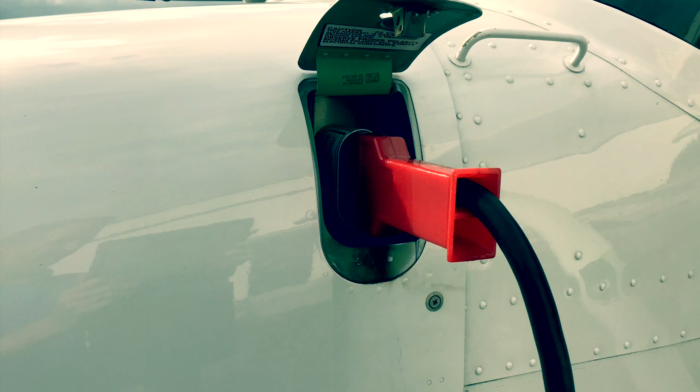All right. So talking about systems tonight. We are going to focus primarily on the concept that you'll have different types of questions covered when it comes to different progress checks, and in association, the end of course progress check will correlate pretty well with the actual check ride.

So you're going to see the same system questions come up, but with deeper and deeper focus when it comes to each individual progress check. So of course we start out kind of basic, then move further in from there. So that's kind of the idea. So obviously systems are really important. The question could be, why are systems important?

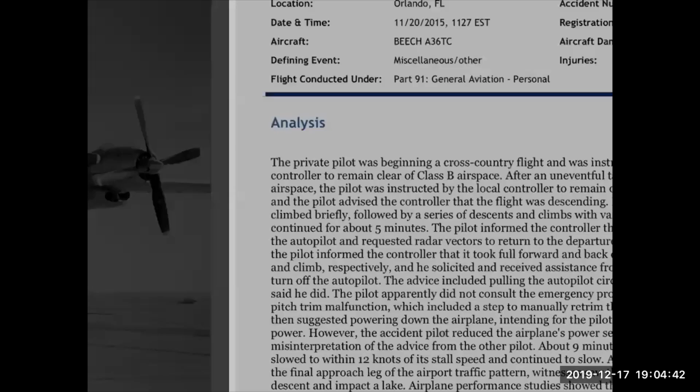So on the opposite of that spectrum, we actually have a situation that occurred close to home a few years ago. This is the basic analysis of an unfortunately fatal accident that occurred literally right in our own backyard in Orlando, Florida. Specifically, this airplane went down in Clear Lake, which is literally on the approach corridor to runway 7. So it had some unfortunate avoidable circumstances that certainly led to the ultimate incident.

In this case, if we read quickly through the analysis, you have a guy departing Orlando Executive Airport. He inadvertently flies into Class B airspace, and then he's instructed by the local controller to exit and then remain outside of Class Bravo. And in so doing, most likely the autopilot was engaged, and the pilot very likely pushed against the autopilot, which was in a commanded climb, to get the airplane to descend.

And that induced a series of runaway trims, or as we call them in this case, pilot-induced runaway trims, because as you push against the flight controls when the autopilot's engaged, the autopilot simply thinks that's some type of force opposing what it's intending to do, so it continues to trim against that. The biggest issue, if we continue to read on, is that for about 5 minutes he struggled with this. Eventually calling on the radio for help, a couple of pilots tried to assist him, told him to pull the breaker. He said he did, and it still didn't disengage.

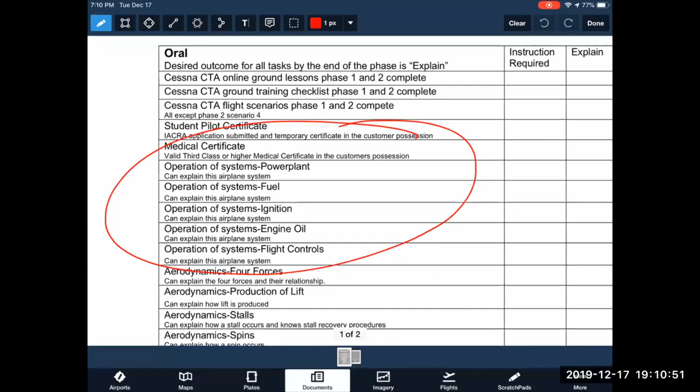So if we think about it, the question is specific. It's not general. So if we're talking about specific knowledge, then we don't necessarily go to the Pilot's Handbook of Aeronautical Knowledge. Maybe that would give us some additional insight, but when we're talking about specifics, that really needs to refer to the Pilot's Operating Handbook or the Information Manual. So we're going to head to the Pilot's Operating Handbook.

The next thing that we could answer is where in this book do we look this information up? You've got the table of contents. If we look at the table of contents and answer the question, generally speaking, what section is this going to be found in? We've got general, limitations, emergency procedures, so on and so forth. Where do we think this is going to be? Well, pretty obviously the best place to get a full systems description on our engine is section 7. So let's head to section 7 here.

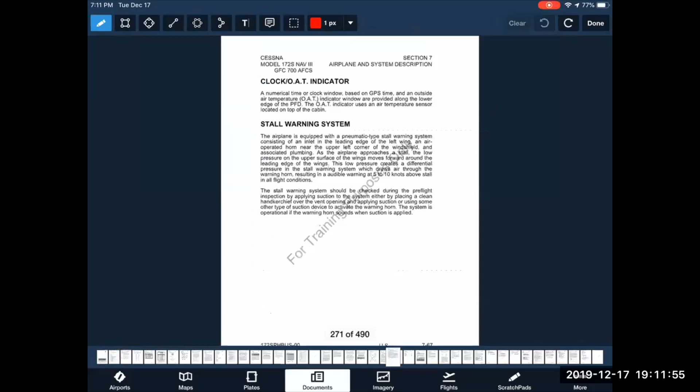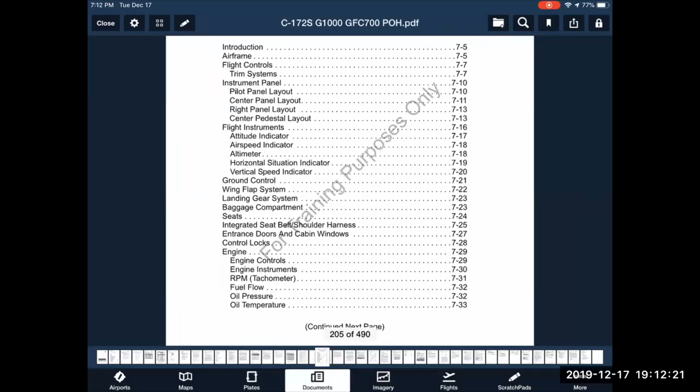And then from there, we're going to find the table of contents at the beginning of the section, and find where the engine information pages would be found. A little bit too far still. So we can see the engine at the bottom of the table of contents starts on 7-29. So let's find 7-29. Let's see if I can hit the jackpot here. Pretty close, so we'll swipe from there.

And so generally the answer we're looking for is pretty much found in this top paragraph. So this engine is ultimately a direct drive engine, which means that there's no gear transmission or gear reduction box. In other words, the engine spins at the same speed the propeller does. There's no speed difference between the two.

Horizontally opposed, that means that the cylinders are situated horizontally opposed from each other or across from each other, unlike a V engine, a V8, or an inline, or a big old radial that you've seen on old aircraft engines. Four cylinders, of course, overhead valve, air-cooled, fuel injected, as opposed to a carbureted engine, with a wet sump oil system. That even kind of goes beyond what we're necessarily looking for as far as the wet sump, but certainly everything up to that point, good information.

It's one thing, of course, to memorize the Lycoming model number so we can spit that out, but what does that really mean to us? That would be, of course, kind of an expected follow-up question. What does it mean if it's a Lycoming IO-360-L2A? So if we break that down, the I means fuel injected. The O means horizontally opposed.

And 360 represents the size of the engine, more or less, more specifically, the displacement. In other words, the volume of air and fuel that is moved. If we were to take a complete stroke of the engine, that would be the volume of air moved for each cycle. And then lastly, the L2A is the accessories package, which they go right into right after this. We'd also benefit to know what kind of horsepower we can produce at maximum performance, and in association, the maximum rated RPM.

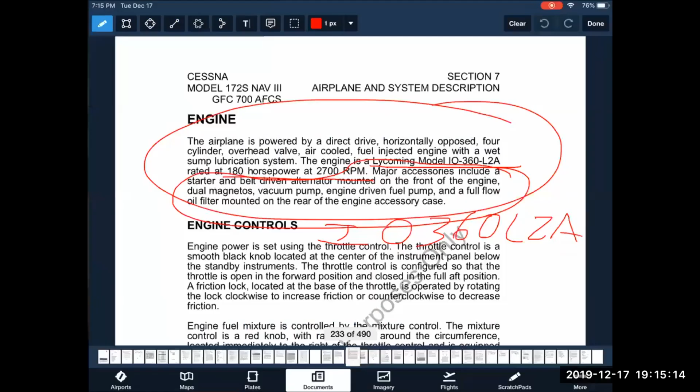Why does the intake valve open and close? What's the purpose of the intake valve, in other words? And secondly, on what stroke does this occur? So once again, let's say I don't know the answer to this question. Where do I find this information? Well, now we're moving outside of specific aircraft knowledge and more to general systems knowledge. So this is most likely to be found in the Pilot's Handbook of Aeronautical Knowledge. Now, if you've read our study guide, you'll know that there are great videos out there, but if we're just talking about reading, the Pilot's Handbook of Aeronautical Knowledge is your best bet.

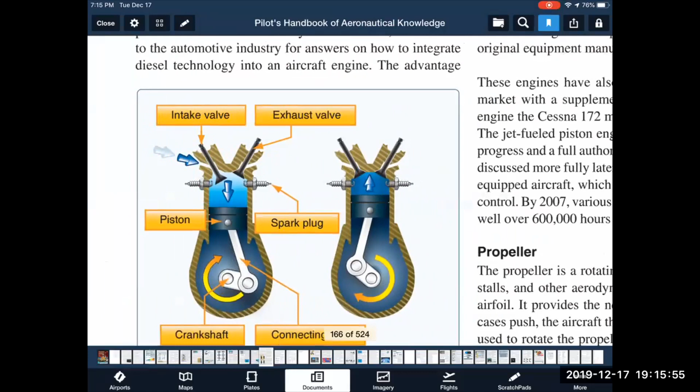Now, I've got a bookmark for this, but the bookmark's not going to be too helpful. That's not what I want to do. So, bookmarked right here, we can answer that question. But more importantly, where is this found? This is found, big surprise, in Chapter 7, Aircraft Systems. And early on in the chapter, they get into the cycling of a reciprocating engine. We can see clearly right here in this step process, as the piston is traveling downward away from the top of the cylinder, that's going to create suction.

You can see the intake valve is located here, which obviously allows our fuel and air mixture to enter the cylinder. And then obviously, if the intake valve doesn't close, then we don't have a contained pressurized system. And without that, you're not going to get good compression, or in other words, you're not going to get very good performance out of the engine. So remember that later, because there's another question that pertains to this. So that's why the intake valve needs to open.

It needs to open so that we bring our fuel-air mixture into the cylinder, and then in association it needs to close so that on the following step, the compression step, we get a closed system, so we get the very effect that we're trying to get. Otherwise, it's not going to be a very good compression, and in association, you're probably not going to have a very good power stroke either.

You know what? I forgot the second question. All right. On what stroke does that occur? I guess we already answered that. So that's obviously going to occur on the intake stroke. It's going to close by the compression stroke. So that's the answer to that question.

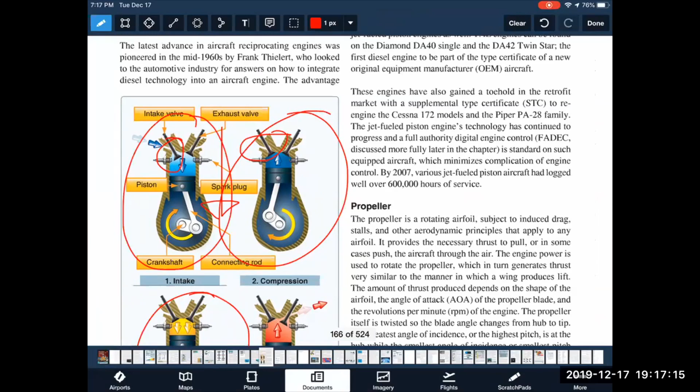All right. So moving along, what are we checking for when we perform a magneto check during the before takeoff checklist? I'm sure everybody's done this so many times that they probably nearly have the before takeoff checklist memorized, but just as a reference, let's open that up. And so we'll find this here under airplane checklist.

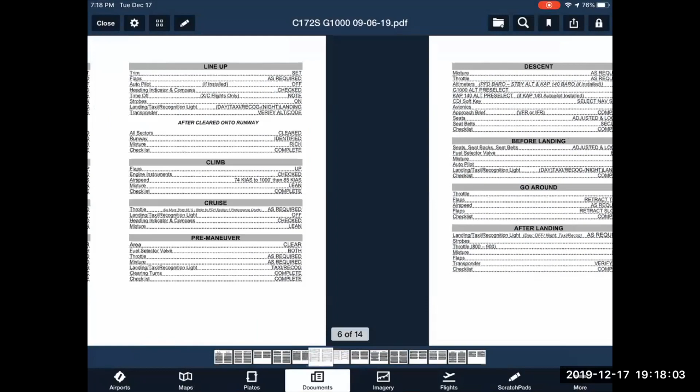Okay, so before takeoff checklist, we obviously know that we perform a run-up, and then of course in association, we're looking for our magneto check to ensure that we have, oops, why did I do that? A tolerance of 175 drop on either individually selected magneto and in association not more than 50 between the two. But why? Why do we care?

Well, obviously, that requires us to understand basic ignition systems. We know that the magnetos ultimately provide the ignition source for our spark plugs to arc properly. So if the plugs are fouled, and if we're not familiar with the phrase fouled, what does that mean? It means that if we looked at a spark plug, we would see basically trash on it, more specifically carbon deposits, because of a myriad of different reasons. Oftentimes, the mixture hasn't been properly leaned, and so we've been running excessively rich, which is obviously why we lean the mixture during ground taxi, to avoid that. But it also could be a problem with the magneto itself.

We can possibly remedy a spark plug that is fouled by increasing the temperature inside the cylinders as they create the power stroke, and in association, those exhaust gas temperatures are going to heat up enough to where they will kind of burn off the carbon if it's not too dirty. If it's too dirty, it's going to have to be mechanically cleaned, and so we will probably not be able to solve that problem on our own. Certainly, if it's a problem with the magneto, there's not anything you can do there except return the airplane and have it inspected by maintenance personnel, and they solve the problem from there.

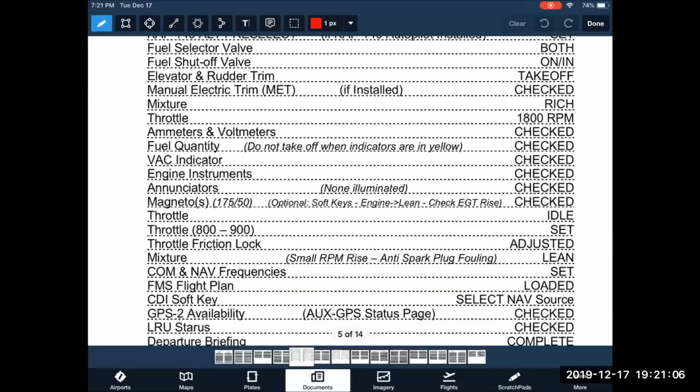Let's take a look at what Cessna's Pilot's Operating Handbook has to say. So we're going to head back to the Pilot's Operating Handbook. We're going to open up to our systems page. Let me clear out my notation there. And we're going to jump ahead to the lubrication system. So what does it say here? Well, in this case, it's not going to get too much into detail about the benefits. It's already going to start talking about specific systems knowledge, but it does say the engine utilizes a full pressure wet sump type lubrication system with aviation grade oil as the lubricant. So that's one of our answers right there.

The oil lubricates the engine because big hunks of metal moving at very high speed, rubbing up against other pieces of metal, is not going to do so well. It's going to get really hot if it's not properly lubricated. So we now know that it would lubricate. It would also help manage the heat of the engine. And it would also help clean the engine, keeping out any kind of components that can dirty up the engine and cause further degradation of the engine.

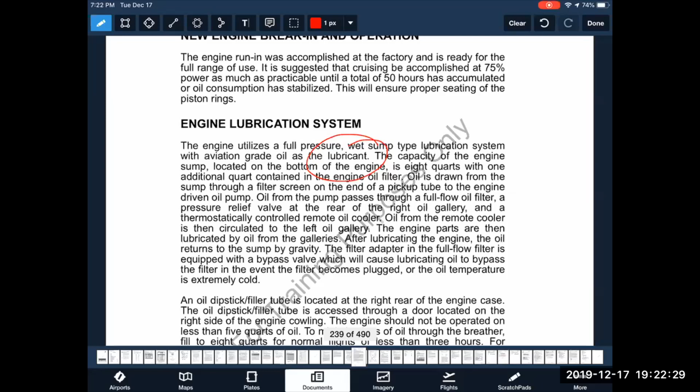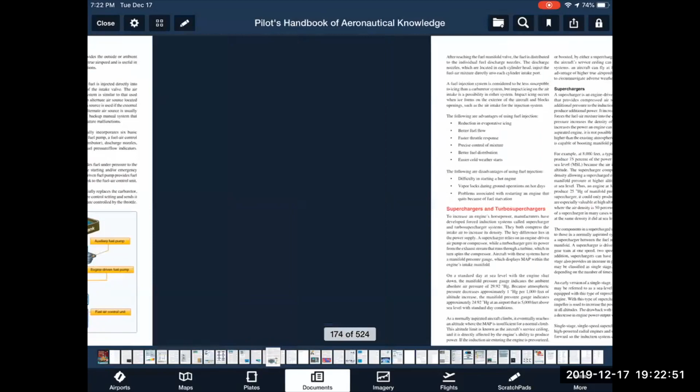Where could we find this information in the Pilot's Handbook of Aeronautical Knowledge? Well, let's take a look. So do we think it's in the systems knowledge chapter? Most likely. So let's see if we can find this together. We can see it's talking about propellers for a little bit, carbureted and fuel injected systems. Then it gets into superchargers.

So, again, all these answers can be found in a myriad of different ways. But if you're just looking at books, not watching the videos that we recommend in the study guide, not going to the online course, the book you're looking at most likely in relation to systems is either the Pilot's Handbook of Aeronautical Knowledge or the Pilot's Operating Handbook for specific systems knowledge.

All right, let's jump into our next question, which is now moving up to Phase 5. So we're going to see the questions move from less of a what type question into more commonly a why, or more specifically a scenario-based question. So we step up not only the systems knowledge, but also the awareness to make a good decision in relation to the particular issue at hand.

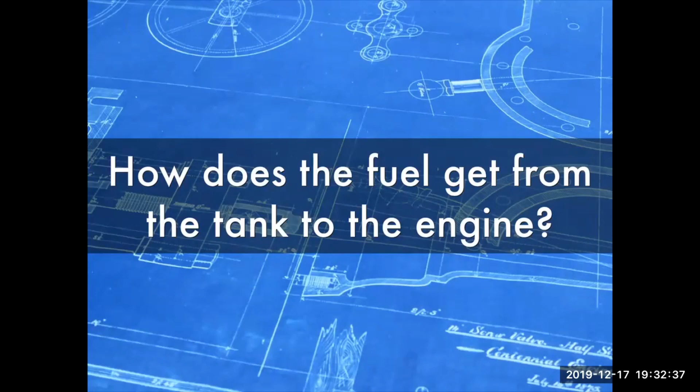All right, how does the fuel get from the tank to the engine? Let's say once again we don't have a clue where to find the answer, but let's think about this. We're getting back into more specific systems knowledge. So once again, the best place to head is the Pilot's Operating Handbook, specifically for our aircraft. So let's head to the POH again.

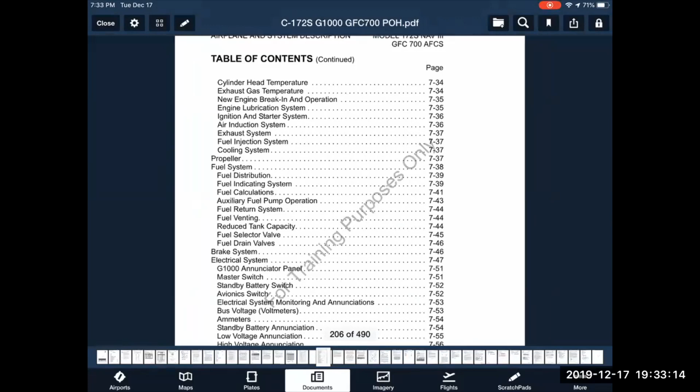And we're looking in this case for the fuel system. We could just slide to it if you know where it is, but if you don't, the best place to head is back to the table of contents, which is exactly what I'm going to do. All right, do we see it on this page? No, we don't. There we are on the second page, on 7-38, we find the fuel system. So let's head to 7-38. A little too far there.

In the actual airplane, there's components we can actually see, and sometimes the fuel lines are going up vertically, also going downward. So this is the best place to start. Then, it's highly recommended to take the cowling off an airplane, head over to maintenance sometime if you're specifically struggling, and view these individual components. But this is ultimately the answer to the question.

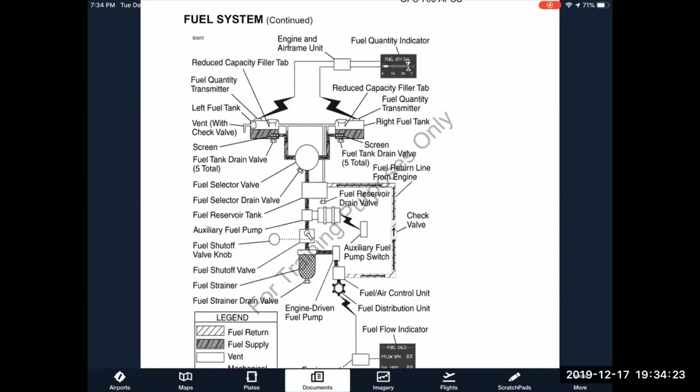Now, are we expecting you on the Phase 5 progress check to draw this out? The answer is no, we definitely don't expect you to draw this out. If you can draw it, that's great, because it assists you in visualizing the flow and certainly helps you recall things instead of having to rote memorize it, which leads to forgetting things. And ultimately what we most importantly want is to make sense of the system.

So if we look here, starting out, let me use my pencil here. We've got some fuel tanks, as indicated there, and obviously we have two wing fuel tanks. There are floats that, via a transducer, give us our fuel quantity indication via our electric connection there.

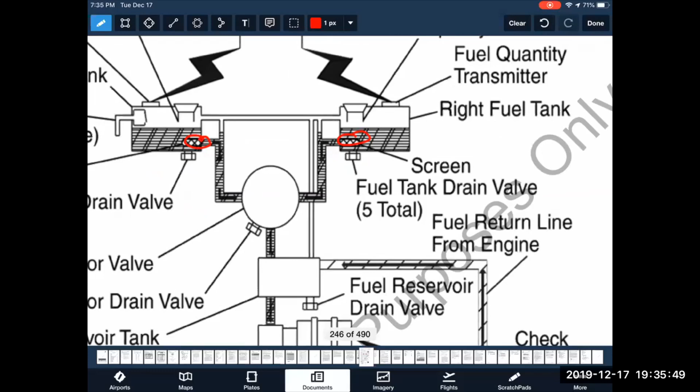We know that, of course, for each individual wing tank, there are 5 drain valves, as we can see indicated here, positioned along each individual wing. Then, once the fuel is introduced to the port or the pickup, there is a screen there that helps ensure that at least large particulate contaminants are contained and are not allowed to be introduced further into the fuel system.

What's the first thing that it goes through? Well, it's our fuel selector. And we know, as part of our pre-flight, that the center drain underneath the belly is drained from the fuel selector because it is a low point in the fuel tank. And therefore, water could accumulate in that location. So thus, the importance of draining the fuel from that position.

Then after the fuel selector, which kind of has an obvious purpose, it allows us obviously to select both tanks or individual tanks. It's then going to flow to a reservoir tank, which is the closest drain to us, I guess, as we approach the belly from the right wing. And so in association, you've got that drain there as well as the drain for the fuel selector. Let me clean this up a little bit.

What's the purpose of the reservoir tank? Well, we can see that there is a return line that reintroduces unused fuel or unselected fuel back to basically a holding position. So that contains the fuel in place to simply then be reintroduced, to then be eventually consumed by the engine. But the point is, of course, that has a low point where water could obviously accumulate. So in association, we drain from there as well.

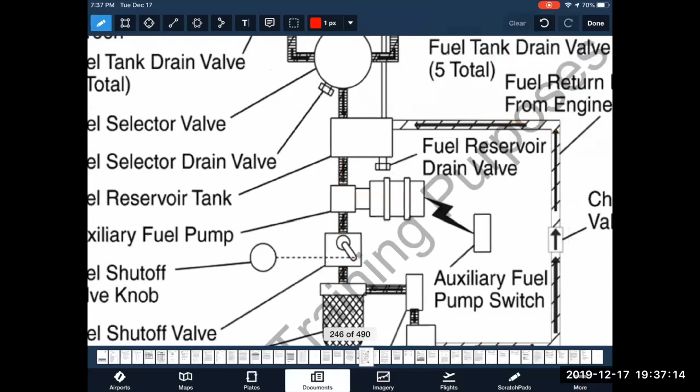Following that, you then have in line the electric or auxiliary fuel pump. From there, we have a mechanical fuel shutoff valve, which of course is the red knob that we can pull out to literally block the fuel from traversing any further into the system, eventually being introduced into the engine.

Then you have a strainer, which is your third belly drain. That, of course, is set up to capture especially fine particulate, fine sediment, for example. And so that's where you certainly likely could pick up any kind of fine sediment if there was any in the system, in addition to, of course, certainly some possibility for water as well. So those are your 3 drains under the belly. That one, the reservoir, and the fuel selector.

From there, we flow to the engine-driven fuel pump. And then our fuel air control unit, which is where we ultimately control how much fuel is distributed into the engine, but also that's, for example, where the pickup box for the air intake that you guys check the air filter, the air is introduced into that control unit.

And then from there, it ultimately goes to the spider, also known as the fuel distribution unit, by way of a fuel flow transducer, which is what gives us our digital indication of our fuel flow. So that way we know how many gallons per hour we're consuming.

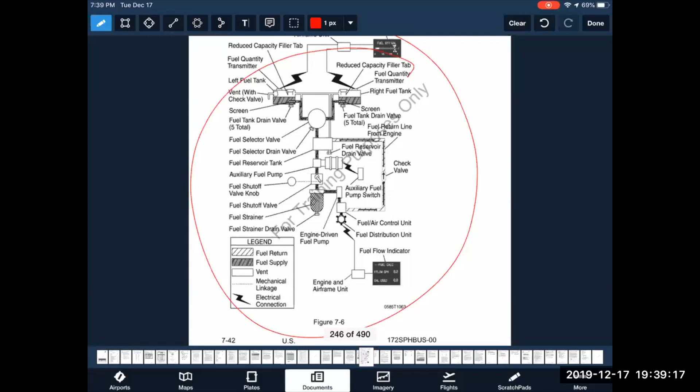Now, how well do you need to explain that at a phase 5 as opposed to drawing it out? Well, the most important thing is to have a good grasp on it. The second most important thing is to remember where to look this information up. If you don't know it by heart, then just as important, probably, especially early on, is the knowledge of where did I find this information before? And that's why we want to do it this way. I don't want to just give you a slide and tell you this is the way it is. You want to learn this for yourself by ultimately knowing where this information comes from.

Yeah, so therefore, if you forgot about this and you're like, I know I'm forgetting something, and you go and you look up the information, you're like, oh yeah, it was the fuel strainer. Then as a check pilot, I'm going to be probably more happy that I know that you know where to look the information up rather than just you memorized it and have no clue otherwise where you could find that information if you ever forgot anything about it.

All right, let's move ahead. So in this question, what would you do if during your pre-flight inspection someone approaches you for small talk?

There's probably a couple of different acceptable answers here. This isn't looking for someone to be cordial. It's probably still best to be cordial. So you could choose to, of course, engage that person in small talk, but what you certainly want to do is save your place in the checklist. At least put your thumb there, if not even maybe mark it in some fashion.

You could also just simply tell the person, you know what, I'm sorry, I don't want to get distracted during my pre-flight. Can I finish this first and then I'll come and talk to you? That's perfectly fine in my opinion as well. Basically what we're looking for here is the understanding that if you get distracted during your pre-flight, it's very possible you're going to forget some things. You're going to skip some things and not realize you didn't do them. So one way or another, make sure that you avoid that possibility, because that absolutely does happen.

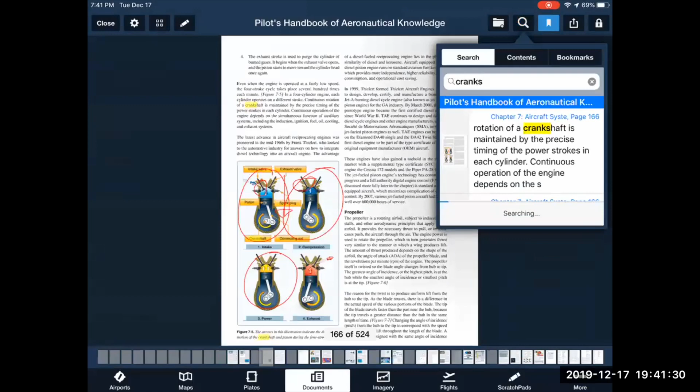And the follow-up, how do you thoroughly inspect the fuel tank venting system? So let's talk about that. As we do our pre-flight walk around, what are we checking for? First of all, we need to know what is venting our fuel tanks. So let's talk about just some general systems knowledge again. We could certainly get into the specifics. Let's say this time I still don't know what I'm looking for, so I'm going to go to fuel vent and see if I get any luck there. I didn't get any luck. Oh, there we go. No, that's not what I'm looking for. I think that's the only one it's going to come up with.

The girls need my help. Oh, okay. Thank you.

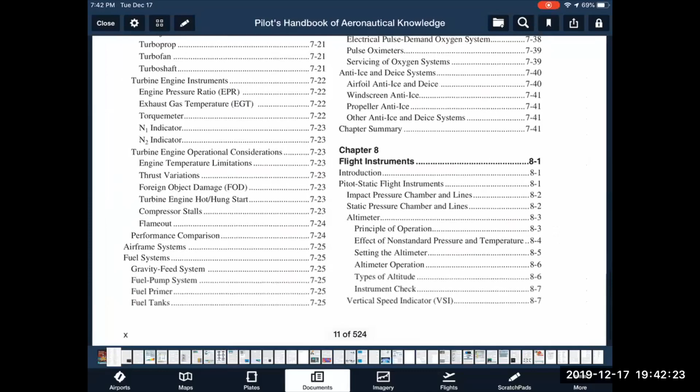Sorry, one second. Okay. So if that doesn't work, then let's try our table of contents and see if we can't find our fuel system. So chapter 7, aircraft systems, we've got power plant. Let's jump ahead and see if we can't find something on basic fuel systems. So there we go. We've got fuel systems on 7-25. So let's jump ahead to that.

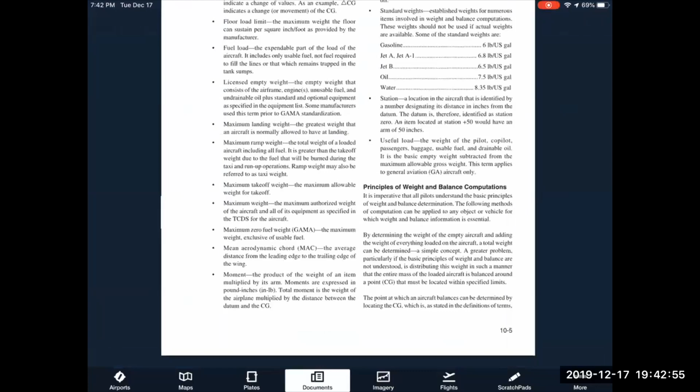But what are we looking for specifically on the fuel caps? First of all, making sure that they secure properly with good O-rings. But we also want to make sure that we don't see anything obstructing the vent opening itself on either side for that matter. And if you're not aware, there's a little orange cap cover that should also be installed to ensure that air is allowed to enter, but nothing else is allowed to enter, or technically escape. So those orange caps should be on the bottoms of our fuel caps as well.

The key is we're checking all of that. So we're not just checking the vent alone. We also need to check the caps for proper security, but also that they are unobstructed in addition. The second part of the question, or I guess I should say the third part: why would an inoperative venting system possibly cause an engine failure?

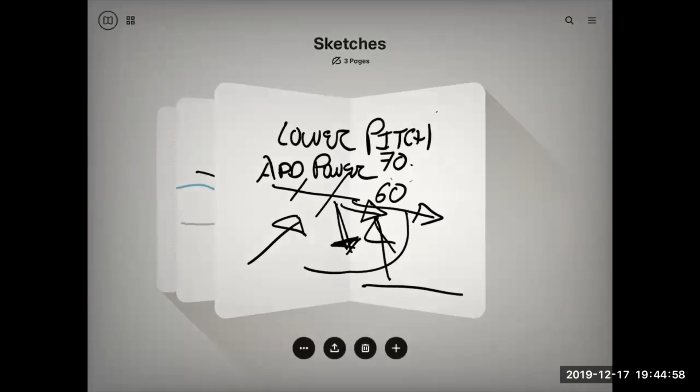Well, let me draw something out for you this time. I know I said I would use references, but this will probably be better to visualize, as admittedly they don't really have the best illustration here. So let's imagine that this is a fuel tank, and we have our pickup port here, and then we have flow in this direction, either due to gravity or suction due to some type of pump. And then we have a fuel amount. Well, if at any point in time our vent were to become clogged up, right?

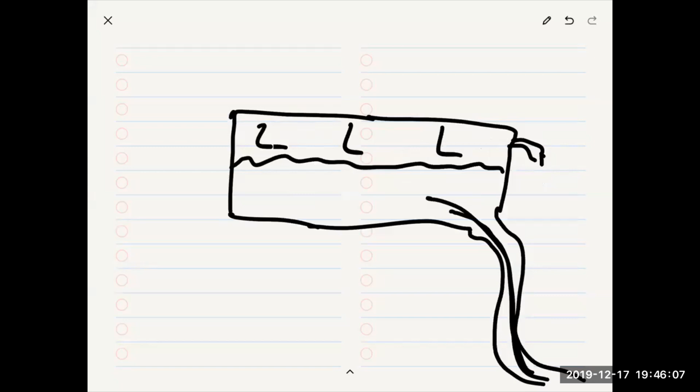So of course air is not able to move into this area and therefore fill this volume. As the fuel is consumed or as it exits via the tank, we have a particular problem, because without air able to replace that area, we create a vacuum. In other words, you create a low pressure area on this section, which means, because of its low pressure, it will create suction and try to pull the fuel in this direction, while obviously the fuel is attempting to go this direction.

So you get the idea. If the vacuum becomes strong enough in that area, it can basically slow, or even worse, fully interrupt our fuel flow to our engine, and therefore suffocate our engine. So it's critical that our vents, or also if we have vented caps, are able to do their job to ensure airflow can get into that area and therefore avoid creating a vacuum. Otherwise, it could possibly cause an engine failure.

All right, next question. While over an open field during ground reference maneuvers, the oil pressure annunciator illuminates. What would you do? So let's stop and think about this situation. We're obviously low altitude doing ground reference maneuvers. We're fortunate enough to be over an open field. The question at hand, though, is what's the significance of an oil pressure annunciator? To answer that, you probably need to know when is the oil pressure annunciator supposed to come on?

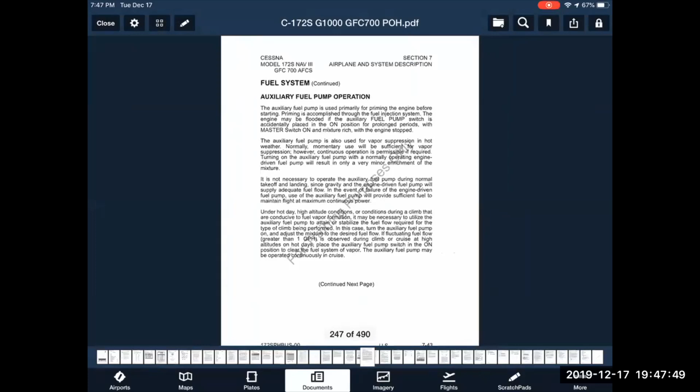Where would we find that information to start? Well, no surprises. It's going to be found in specific systems knowledge. So in this case, it's going to be found in the Pilot's Operating Handbook. All right. So if we're talking about an oil system related question, then obviously we want to head to the engine and oil system. Now, somewhere in here, they're going to discuss instrumentation in relation to oil pressure. And we find it here under engine instruments.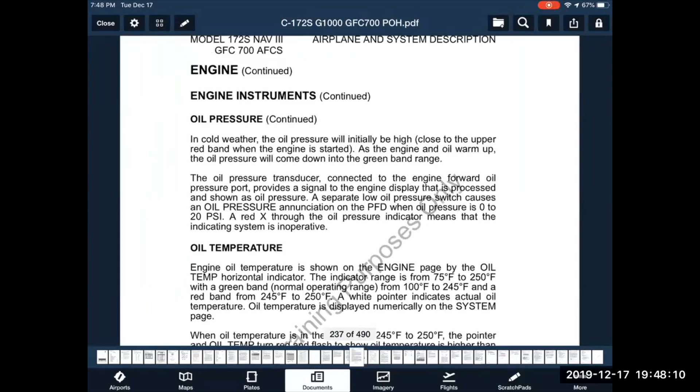And we find that there is information about specifically when that oil pressure annunciator comes on. It says a separate low oil pressure switch causes an oil pressure annunciation on the PFD when the oil pressure is between 0 and 20 psi. Well, that definitely tells us that if that oil pressure switch is on and it's working properly, we probably don't have much of any oil circulating through the engine. Of course, you see this every time you're doing pre-flight when the engine's not running, because the oil PSI at that point is 0, and that's why you see the oil pressure annunciator.

So the question at hand then is are you going to have an engine seizure? There's no guarantee whether the engine will seize up. But if we talk about the likelihood, it's very much likely. So the best decision in this situation is to presume that the engine is going to seize. It's simply a question of how soon it occurs. So do we head to the nearest airport? Well, you're at 1,000 feet. So how close is that airport? And what kind of terrain are you going to have to overfly to get to that airport? It may in fact be the best option to stay exactly where you are.

Well, let's pull our checklist back up. This is kind of a poor example, Emily, because it's not going to be the proper color, so just bear that in mind. It should be not red, but yellow. And it's found on the back side of the abnormal procedures checklist under low voltage annunciator on. Running through the top section, it tells us to turn the alternator side of the master switch off. In other words, we're power cycling the alternator, but before we do that, we're checking the alternator field circuit breaker to make sure it's in.

Now, there's two schools of thought on this. You could push it in immediately. If it opens again, don't push it in again. There's a second school of thought, which is, do I really need what I'm trying to re-engage in this situation? Because the breaker opened for a reason. Either the breaker's faulty, admittedly, or we did have some type of excessive load, and the breaker did what it was supposed to.

So you have to answer the question, do I really need this equipment compared to the circumstances at hand? In other words, weigh the cost-benefit analysis. What's the risk in this situation? Well, it's possible that this could lead to an electrical fire. Unlikely, but fires and airplanes don't mix, so even a low likelihood warrants some consideration. So maybe consider before you even push the breaker back in, how desperately do I need this capability?

And then, let's say that it's already in, or you've chosen to push the circuit breaker back in. Then you would turn the alternator side of the master switch back on. And then if things are hunky-dory, in other words, you've re-energized the alternator, we should see the low voltage annunciator extinguish. We should see the main bus volts a minimum of 27.5, and the amps on the battery should also show a charge as well.

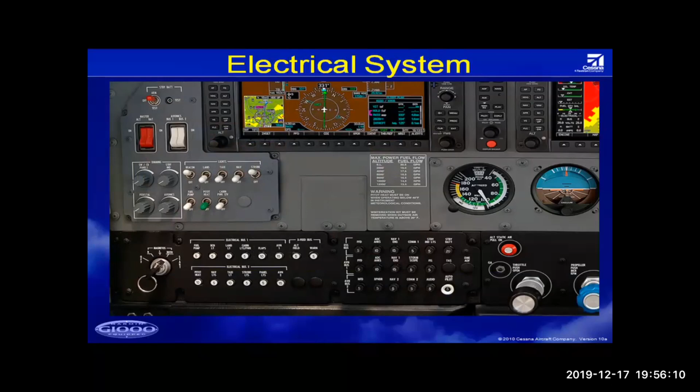So where is our electrical system? Really what you can do is visualize different components in different sections of what we're looking at on the screen here. Bear in mind that this is a 182, so you'll see that there's a small set of differences, but for the most part, pretty much the same stuff. So when we talk about the electrical system, we have the switches in the top left-hand corner. Then we have the circuit breakers down below, which are organized in buses.

So if you've ever wondered what power strip, if you will, or what bus a component is on, all you have to do is look down there at the circuit breakers, and they are organized in conjunction with the buses that they're on. Then we have our alerts and annunciators, and we have our voltmeters and ammeters.

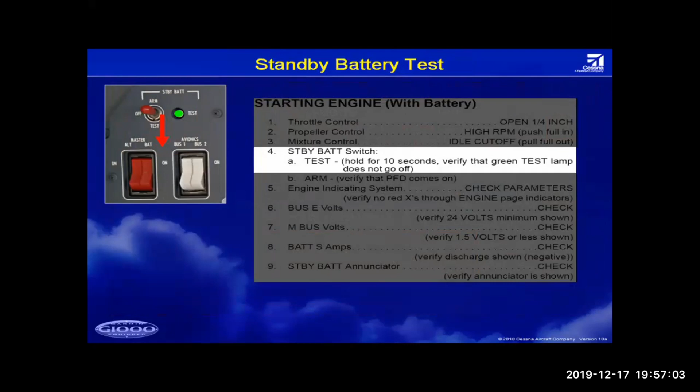All right, so everybody should be familiar with this, of course. We push the standby battery switch into the test position for 10 seconds, verify that the green test lamp doesn't extinguish. Then we arm the standby battery. And then at that point, what is happening? The primary flight display illuminates because the essential bus is powered.

So if you want to know what the essential bus comprises of, we've got a breaker for our primary flight display. We have a breaker for the air data computer, which gives us all of our airspeed, altitude, vertical speed information, as well as the attitude and heading reference system, or AHRS for short, which gives us our pitch and roll and heading information. We've got a circuit breaker for navigation radio number 1, as well as the engine airframe unit, which is our EIS as well.

We've got a circuit breaker for communications radio number 1, and a circuit breaker for our standby instruments. Their indicators have backlighting, so there's a breaker for that. And then lastly, there's a breaker for the standby battery. That's what's being powered right now, as indicated by the yellow. The yellow means that we're discharging from the standby battery. We're drawing from it, so this wouldn't last forever, thus the yellow color coding associating a draw from the battery.

All right. So this is what we get when we check the electrical bus volts as well as amps. We get a draw on the standby battery. The first thing we check in the checklist is to make sure that the essential bus is at 24 minimum. That tells you that the standby battery is in good health. It's where it should be. But this is checking to make sure the standby battery is not powering anything else.

If we look at the diagram, there are check valves known as diodes that disallow flow from the essential bus to any other electrical components. So you're checking that very aspect. Every single time you've done this pre-flight, this is the very thing you're checking for. You're making sure that the standby battery can't power anything else except for the essential bus. In other words, if you saw that the M-bus volts was above 1.5, then it's possible that the standby battery might be powering some components on the M-bus.

And if this situation occurred in flight where the standby battery was running the essential bus, it would drain faster, or possibly be unpredictable in how long you can expect it to last. So we're checking to make sure that the essential bus is contained by that check. We're also making sure that the draw is indicated on the standby battery. We can see that there's negative amperage or draw from the standby battery, and the standby battery annunciator is illuminated.

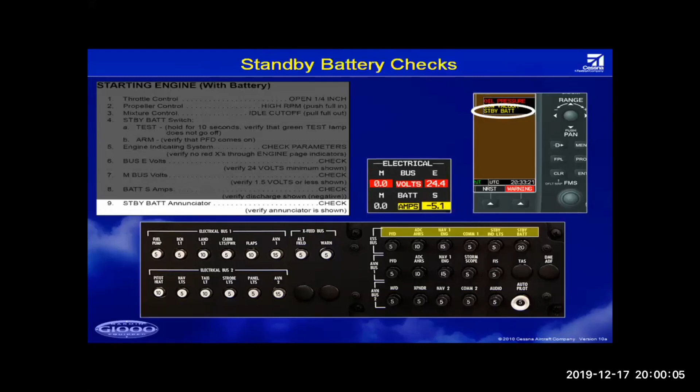All right. So far, so good. So then we turn on the master switch. When we do that, we can see that the M bus, now comprised of electrical bus 1 and bus 2, that also feed a cross-feed bus, is also being powered in addition to the essential bus. That means that the master battery, or the main battery, now powers electrical bus 1 and 2, as well as the essential bus. And you can see that there's no longer a draw on the standby. There's a draw on the master battery, and there is no standby battery annunciator.

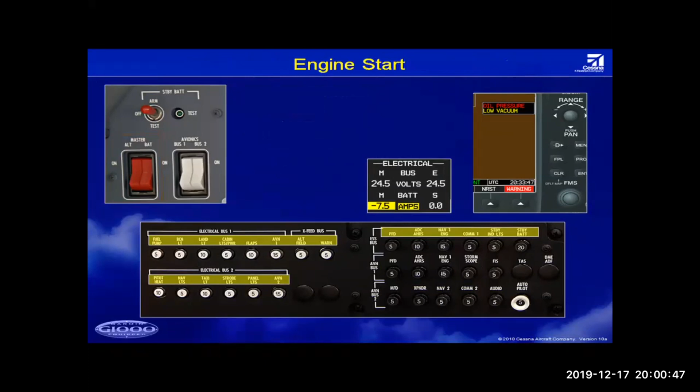All right, we start the engine up. What happens? Well, obviously our belt-driven alternator that is accessorized to the engine crank will then in turn, of course, begin to rotate. And as long as it's operating properly, we now jump from, notice the bus voltage before, 24.5, to now the alternator running the system at its capability at 28. So the buses now run at 28.

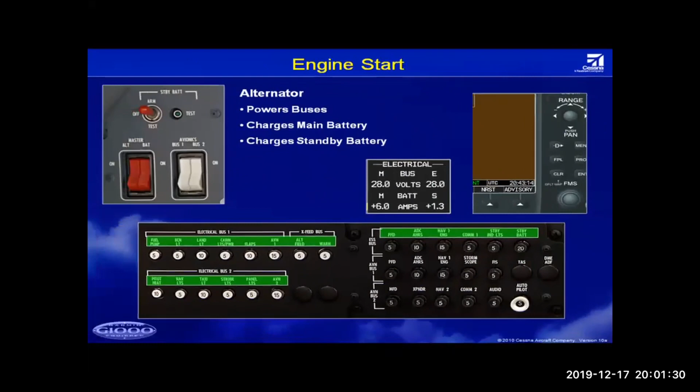So when we turn on the avionics switch, of course, bus 1 and 2 are then powered. And this is your normal operation. There should be no annunciations, right? No alerts. We should see 28 volts. And of course, once the batteries are fully charged, you should see 0 amps because there's no flow in either direction. Everything is fat and happy. It's sustainable. We can continue on like this basically for as long as we can keep the alternator operating.

So what happens then in an alternator failure situation? What is our first indication? This is a very likely possible question, for example. Your first indication is not audible, not visually depicted in the CAS window as it's known, or the annunciator window. It's the yellow associated draw from the master battery. That's the first indication. So you are powering, once again, everything via the master battery. And thus, that's why you have a large amperage, which obviously means we're depleting the master battery quickly.

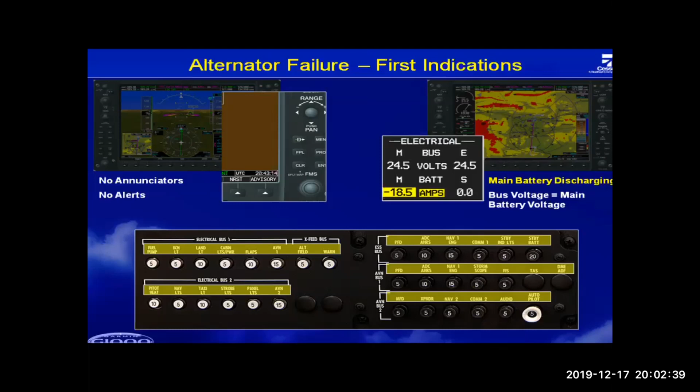So that's your first indication. There's not going to be any aural association again. There's not going to be a bunch of flash. It's just a yellow coating down the bottom left-hand corner of the multifunction display. Then, once you drop below 24.5, that's where the bus volts will begin to flash at you. Again, no annunciators, no aural alerts, just a flash.

Now, it does flash back and forth. I wasn't able to do the red and white flash, but those bus meters will ultimately flash back and forth. And that's more likely to catch your attention, even if you're not really looking in that specific area, because it simulates motion and is more likely to grasp your attention. But once again, not audibly yet. Not until we drop below 24 do we then get the low volts annunciation.

You also get the flashing warning down in the alert soft key, which will not stop flashing, nor will the aural alert that chimes every 2 seconds until you acknowledge by pressing that alert soft key. Again, the alert soft key there underneath the warning light will stop the aural alert and also the flash at you. That acknowledges that the system has gotten your attention and therefore it will stop bugging you. But until it thinks it has your attention, it's going to keep bugging you.

So this is what you would see. You've got bus volts below 24. You've got a draw on the master battery. You've got the low volts annunciator. And, of course, the warning alert soft key down in the bottom right-hand corner.

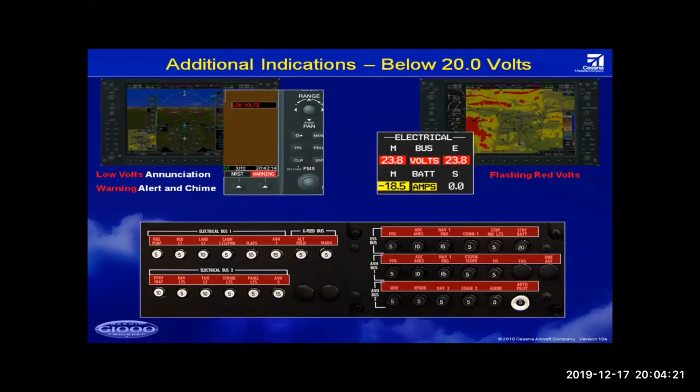Then once you drop below 20 volts, that's when the standby battery will begin to power. Now, you may think it's going to power everything, but once again, as we just discussed, it's not. It's only going to power the essential bus. The master battery actually continues to power everything else. But at this point, the standby battery kicks on, and that's when you know, based off the manufacturer, you have approximately, for a healthy standby battery, at least 30 minutes, where the main battery at this point is going to begin to rapidly deteriorate.

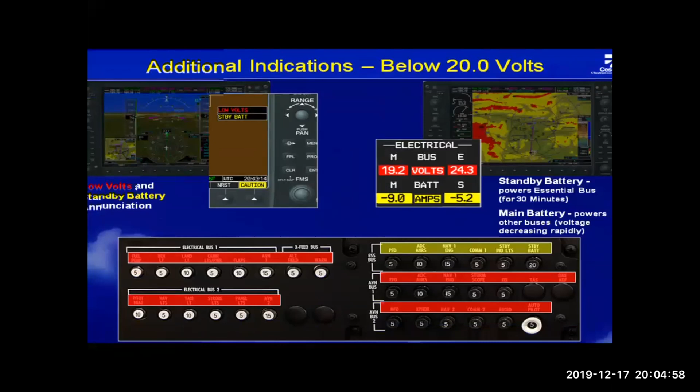And in association, by the way, I forgot to mention, you'll get the standby battery annunciator and a caution alert, just a single audible chime. As the main battery begins to decrease, you can expect the MFD to basically dim down, the audio panel disappear. Basically, everything that we see in the avionics buses will be unavailable unless there's a redundant source of power.

So at this point, standby battery is powering the essential bus. And at that moment, like I said, even before the master were to fail, that's when your tick starts down for a 30-minute time frame. Is this enough to get on the ground? Absolutely. Again, we even talked about a full electrical failure would still be manageable in lots of different circumstances.

So what do you get on the essential bus one more time? We get a primary flight display, the air data computer, the attitude and heading reference system, navigation radio 1, engine airframe unit, communication radio 1, and power for the standby lights.

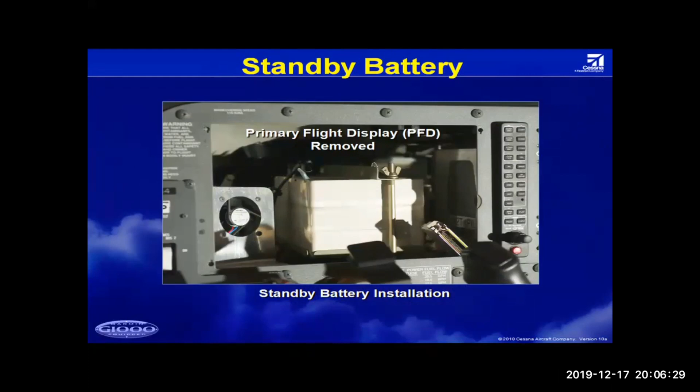If you want to look at this again, you can take a picture of it now, take notes, whatever have you. But remember, next time you're doing your pre-flight, all you have to do is look down, look at the circuit breaker panel, and you will see that very picture there showing you what's on the essential bus, for that matter, any other bus as well. And then lastly, we just got a quick picture to show you where the standby battery is. There you can see it's actually located behind the PFD in that case.

All right, so now that we have some systems knowledge, of course, we can really figure out what we're going to do. So we would go through our checklist after we verify we were in control of the airplane. If we were unable to remedy the situation, the best solution, obviously, is to just head back to the airport. There's really no need to declare an emergency unless you absolutely feel necessary, because you're going to have plenty of electrical power to get back to your destination.

Now, better decision-making on top of this is the consideration to run down the standby battery and then save the master battery for your destination. Why? Well, what did we not see, of course, that was on the essential bus that we would probably want for landing? And we saw that, of course, flaps was not on there. So if you would like to land with flaps, you may consider using your standby battery to traverse your cruise flight, and then, of course, use your master when you get there.

To be perfectly honest, if you catch this early on and you haven't just completely ignored the situation, even if you didn't do that, the master battery is going to last certainly long enough to get you back here without really any type of hiccups.

All right, phase 10. So things jump up a little bit. We have increased systems knowledge, increased complexity, and perhaps more pressing circumstances. So in this case, while en route, the oil pressure annunciator illuminates, but upon investigating the current oil pressure, you find it reads normal parameters. The oil temperature also reads within normal parameters, and it's not rising. So how is this possible? And what would you do?

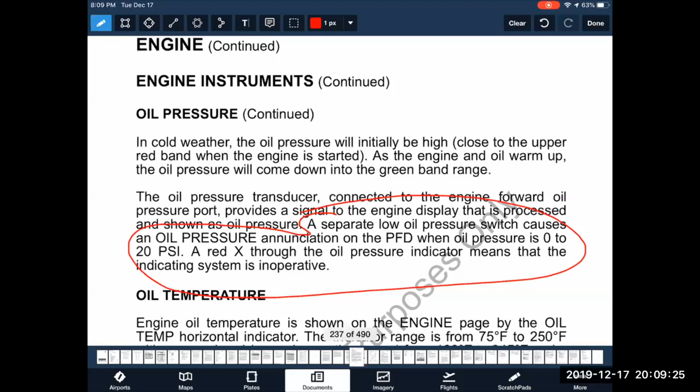So let's do some deductive reasoning in this situation. We have an oil pressure annunciation, but the current oil pressure and the temperature show normal parameters. They're not showing any signs of any issues. So if we deduce the situation, it's likely that we have a faulty pressure switch.

And therefore, probably the oil pressure is okay. In fact, it's very likely it is. And most likely, therefore, will not cause any issues. But remember, there's the second question. What would you do? Your best course of action still is to make a precautionary landing.

However, instead of necessarily waiting for your engine to fail, circling over a field like we talked about in the previous situation where all indications are showing an impending issue with the oil, in this circumstance, make a precautionary landing at your nearest suitable airport. You don't need to make an off-field landing unless obviously the other indications begin to indicate some problems. But you should still make a precautionary landing.

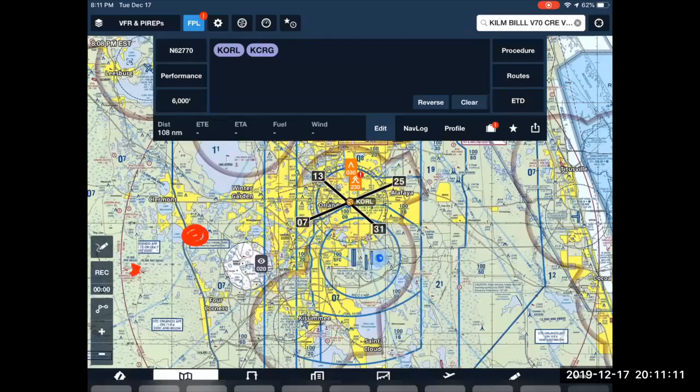You would not continue on your way to your destination even if that destination was, say, 30 or 50 miles away, when there's obviously a more suitable practical field that's closer to you. On top of that, even better decision making would, of course, be avoiding populated areas once again. So let's say, for example, let's just create a quick flight plan here. So our destination is Craig Field up in Jacksonville. And this circumstance occurred maybe in this area, let's say right here.

I could choose to divert to Daytona Beach or Ormond Beach, but I am going to have to fly over fairly populated areas to get there, even if it's not the yellow light illumination that we see on the chart. It may, in fact, be better to divert to an airport where I know I'm still over relatively unpopulated areas, and therefore more likely have more forced landing options along the way. That would kind of be your best decision making going forward.

But the main thing we're really looking for in this situation is ultimately that you would make a precautionary landing, and basically as soon as practical. Just because even though we're pretty confident of what likely the situation is, there's no reason to be hanging out in that airplane in case it's not the case.

All right, our next one. While on a cross-country flight, the alternator fails. You have attempted to rectify the issue to no avail. So now discuss for us how you would load shed considering the nearest practical airport is 45 minutes away. In other words, you've got to elongate the life of the battery. What can you do to elongate the life of the battery?

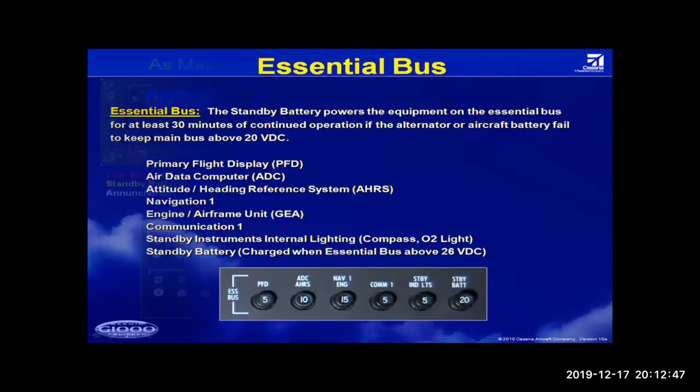Well, that requires systems knowledge, and it also requires systems knowledge to a point where you understand what's drawing heavily on the battery. So let's go ahead and do this. We'll go back and we'll look at some of the components here, and then we'll also look at them separately in a separate circuit breaker diagram. Here's your first answer. The first thing you want to drop is the battery basically providing electrical power to a failed alternator.

So this isn't something I'm going to get too heavily into just to save time, but if you didn't already know this, an alternator doesn't work exactly like a magneto. A magneto uses a permanent magnet. An alternator uses an electromagnet system, which means that you need to have electrical current to basically turn what's commonly known as the iron core or the rotor in an alternator into an electromagnet. Without it, you won't produce electrical current.

So the point is, that alternator's not working. Where do we get power to electrify the alternator? And the answer is the battery. If you want to test this, the next time you go out to the pre-flight, turn on the master switch with both switches on and look at the draw on the master battery. And then turn the alternator side of the master switch off and see how the amperage draw drops.

So if we're talking about load shedding, obviously the two things we need to consider is, do we really need this stuff? If we don't need it, then there's no reason to have it on drawing away from the battery. So it's a no-brainer to turn off the alternator side of the master switch because it's not giving you anything. Lights are also a good thing to turn off, but at least they technically give you something by making you more visible to other aircraft.

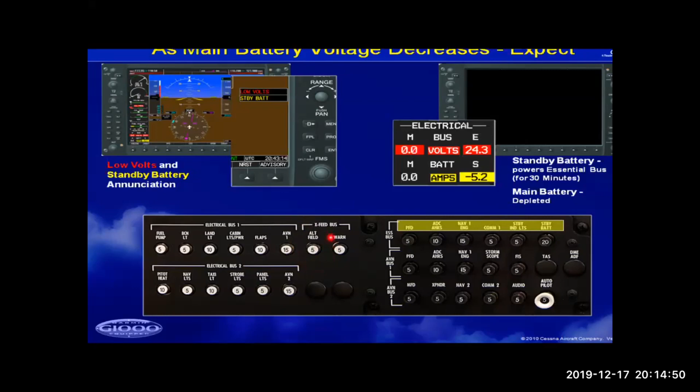If you're powering the alternator side of the master switch, I should say just powering the alternator, you're literally wasting electrical power with absolutely no benefit whatsoever. So that's a no-brainer. That should be the first thing to be turned off in this situation.

If it's a day flight, you probably can get away, obviously, with turning off pretty much everything here. We shouldn't be using the flaps, obviously, while we're in cruise. We don't need our landing light or beacon. We certainly don't need the fuel pump, the pitot heat. All of those rocker switches, in other words, should certainly be off to elongate the life of the battery.

So what it really comes down to is perhaps what you should do in this situation. And this is where we can get some more help, obviously, by referring to the pilot's operating handbook, looking at some checklists in association. So let's jump to that. Take a look at what guidance we have there. So we'll start with the checklist that we have, of course, and then we'll also take a look at what the POH specifically talks about.

So same checklist we were looking at before. What guidance do we get in this checklist? Well, we can see it, in fact, already tells you to do the thing that we just talked about. It will tell you to turn off the alternator side, but now you know why. You're doing it because it's drawing away from the battery.

Then it says non-essential electrical off, avionics bus 1 switch off, COM 1 and NAV 1 tuned to the active frequencies and select, and then avionics switches bus 2 leave on if you're in IMC, but we're not in this situation, so we'll turn off. And then obviously we're trying to get to that destination airport. So we've literally turned pretty much everything off except for the essential bus. And therefore, by doing so, we've elongated the life of the battery significantly.

So follow the checklist. When in doubt, know, of course, what you're going to lose in association. If we look, avionics bus 1 is basically largely a redundant source of power to what we see in the essential bus. You can see there's both power sources for the PFD, power sources for the ADC and AHRS, power sources for NAV1 and the engine. And then depending on the airplane, you get some different stuff here.

So therefore, when you turn on the avionics and you think of the avionics coming on, you're probably thinking of this. The MFD, the transponder, NAV2 and COM2, the audio panel, and the autopilot. That's what you're going to lose. But can you fly the airplane? Certainly. So load shedding is going to elongate the life of the battery and, more importantly, allow you to use the battery when you get to your destination, which is usually where most of the components that you need are more critical anyways.

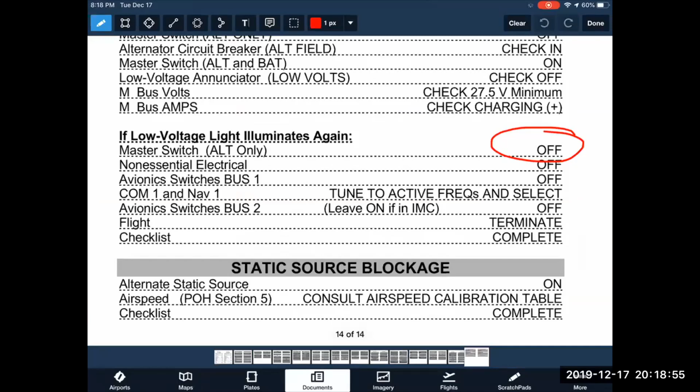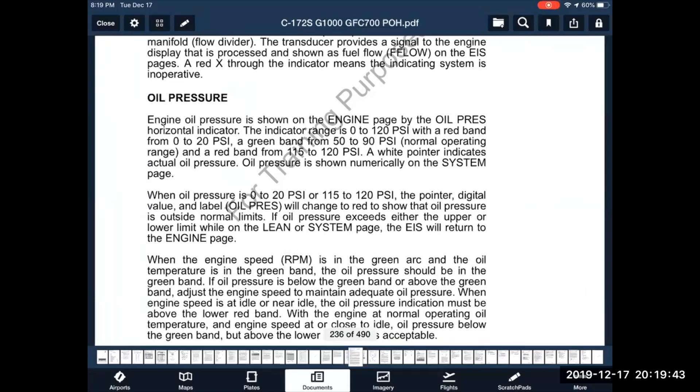All right, so let's figure out where we're going to find the answer to this. For one, big surprise, we're going to find it in the POH. So let's head to the POH. Let's first find out what we're talking about, the full flow oil filter. Let's do some gandering. So if we look here, we're basically talking more or less about the engine indications. So we're unlikely to see it here,

but if we did a search, what would be the best word to put in? Let's try filter. Don't see anything pop up on this screen. Let's try going here. Oh wait, you know what? That's not the right one. Sorry.

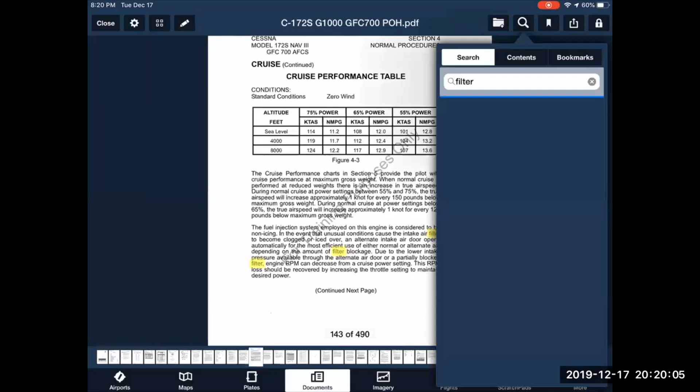There's a voluntary training program to self-improve their skills and build their confidence. The PilotEdge controller will then determine, when you're doing the training, if the task is successful. You pass that rating and move on to subsequent training.

All right. First of all, let's find out what we're talking about. So we can see, first of all, here, we looked at this earlier, but one of the listed accessories on our engine, of course, is the full flow oil filter. So that's a start. We know that the oil filter is mounted on the rear of the engine accessory case.

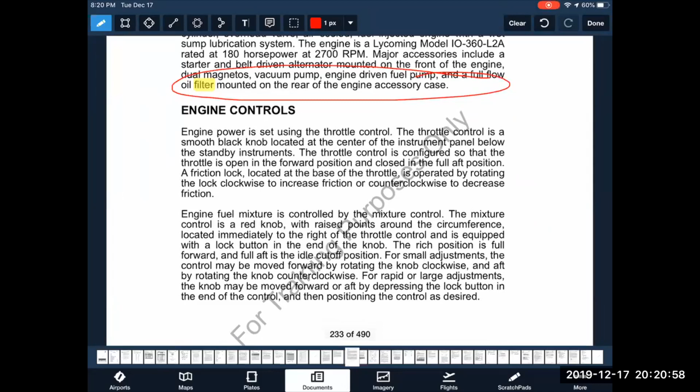The question is really two possibilities. Either the oil pressure is clogged up because the oil filter clogs, or we have some type of bypass that allows oil to flow unfiltered through the engine. So it's one of those two options, and you'd probably guess which one it's going to be. If the system is well engineered, it's kind of obvious, but where would we find this information? So let's continue to do some searching.

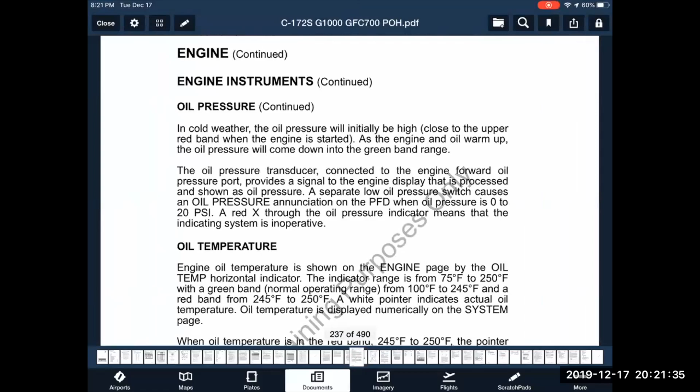We see engine instruments. We see fuel flow. We already took a look at the oil pressure section. We continue here. We saw earlier this is where we talked about the oil pressure transducer and the oil pressure switch. There's some discussion on the oil temperature sensor, cylinder head temperature, exhaust gas temperature. We get into engine lubrication. This is sounding a little warmer. And we looked at this earlier.

So let's see if we can find the answer here. Let's start where we had left off. We can see right here it says oil from the pump passes through a full flow oil filter, a pressure relief valve at the rear of the right oil gallery, and a thermostatically controlled remote oil cooler, which is how we cool the oil. Well, let's continue on, and here we are. We're looking for

that answer right there. So the filter adapter in the full flow oil filter is equipped with a bypass valve, which will cause lubricating oil to bypass the filter in the event it becomes plugged or the oil temperature is extremely cold. So no, the oil will not stop flowing if the oil filter is clogged in this system. It will continue to run properly.

Okay, what about any kind of indications? Largely, there wouldn't be too significant of a change except possibly an increase in oil pressure. You therefore generally won't necessarily know that this has occurred, at least on the initial flight. So there won't be too significant of an effect on the oil pressure as far as a dangerous situation. The engine should continue to run.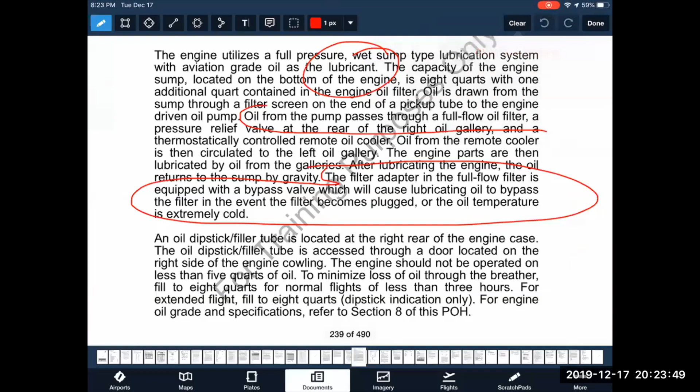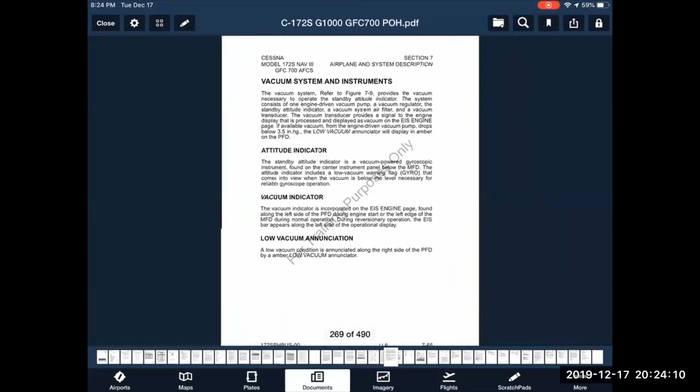How does the attitude and heading reference system provide roll and pitch information? Same place. So let's head back to that POH and take a look at the attitude and heading reference system. This will pretty much cover what we're looking for tonight. There is a section on the avionics in the airplane, found towards the end of section 7.

You can see it begins to get into individual avionics components for the airplane. And then we find what we're looking for here: the AHRS contains accelerometers, which are basically like little tuning forks or cantilevers that swing back and forth when loads are imposed upon them. Tilt sensors, which sense when something's tilting based off gravitational pull. And rate sensors, which work the same way as accelerometers and replace big spinning gyros.

There's no laser gyros, no mass spinning gyros used in other airplanes. And it also incorporates the magnetometer located in the left wing, which provides our heading information.

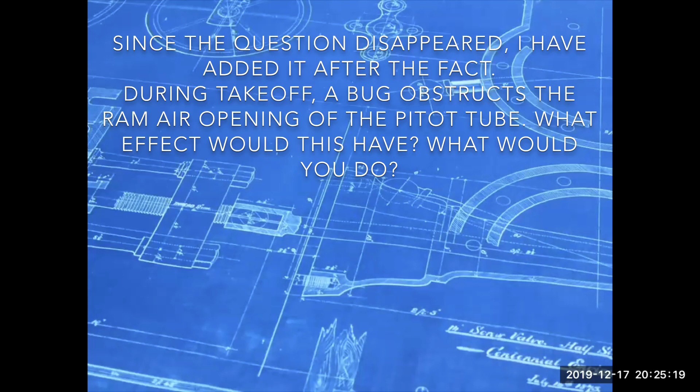My last question got deleted somehow, so I'll have to ask that myself. So the last question is: let's say that we're taking off and a bug flies into our pitot tube and obstructs the opening. How is that going to affect our aircraft systems? And what can we do about it? So this is more general systems knowledge.

To answer this last question, we're headed back to the PHAK. Once again, we're going to the table of contents to find our flight instrument information. We've got flight controls, aircraft systems, aerodynamics of flight, and in Chapter 8, flight instruments. We're looking specifically for the pitot-static flight instruments. So we're going to go to Chapter 8-1.

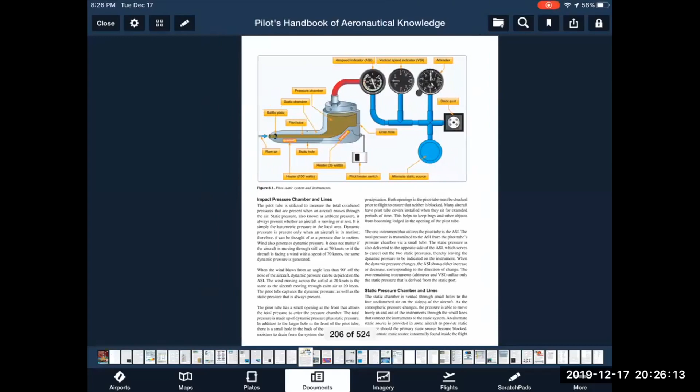And here is what we have. So in this situation, we imagine that a bug has obstructed this opening here. So there's no ram airflow into the airspeed indication. We are still getting static indications to our airspeed indicator. So one of two things has happened.

Either the bug goes so far up into the system that it obstructs the drain hole as well, and therefore there is basically a locked amount of pressure between the airspeed indicator and the end of the pitot tube, or the bug is just blocking the opening, and the drain hole is allowing static pressure to enter in comparison to static pressure from the static port. In this case, there would be no difference between the two.

So the processor that computes the difference between the ram airflow coming in through the pitot tube opening and the static ambient pressure from the static port is able to determine what our speed is, because the ram air is going to be much higher compared to the much lower static pressure, and therefore the higher the ram air pressure, the higher the airspeed readout.

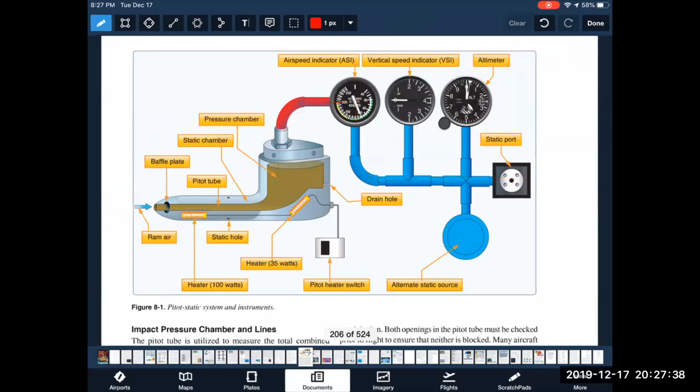However, if there's no ram air pressure, just static air pressure and static air pressure, those pressures are going to be equivalent. And if there's no difference between the two, then it's the same as if we were sitting on the ramp. What does our airspeed indicate when we're sitting on the ramp? It's a big fat 0. So that's one of the possibilities. The airspeed indicator could go to 0 if that occurred.

If, however, the bug blocked pressure up in the line, it's the same as when I blow up a balloon and I trap air in the balloon. That air is under pressure. So now you have a certain amount of ram air pressure that's just stuck in there. It doesn't change. So no matter how fast or slow you go, it just continues to indicate the exact same airspeed, unless you climb or descend.

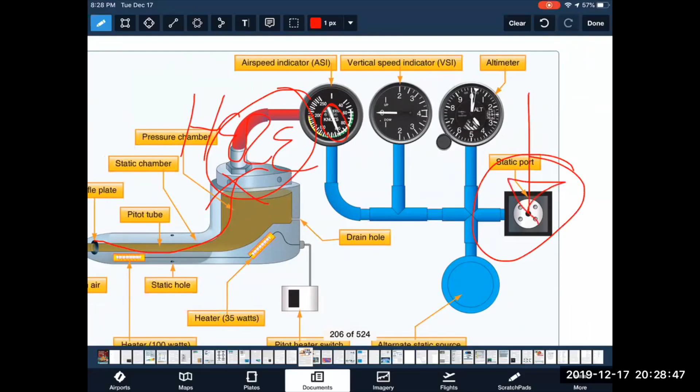And the only reason why it changes at that point is because the ambient pressure changes, whereas the pressure here remains the same. So as you climb, the ambient pressure will go down, and therefore it indicates an increase in airspeed even though you're not necessarily going faster. In other words, at that point, the airspeed indicator is useless. It doesn't tell you anything, and therefore you should disavow that information.

Okay. So what can you do to fix this? Well, you can't obviously unclog the pitot tube, and there's no backup like there is for the static port. So your only solution is to find an alternate means of some type of indication of airspeed. So we have ground speed indicated in the G1000, but even for that matter, if you have some type of tablet, you can bring up some type of indication.

So we can see down the bottom left-hand corner of my screen there a ground speed, which of course, since I'm not moving, isn't indicating any ground speed. So that's not going to be a direct indication of your airspeed, but at least it will be certainly better than nothing at all. That being said, remember,

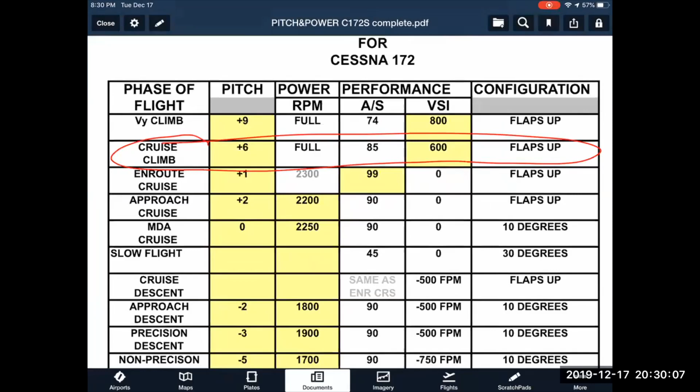if you know your airplane, then even if you don't have an airspeed indication, you still know what the airplane is doing. So we know for this airplane that even if I can't see my airspeed indication, if I'm using 2300 RPM and I'm holding 1 degree nose up pitch, I should expect 100 knots.

In the same way, if I'm on final approach, I know that if I have a configuration of 1800 RPM and about 2 to 3 degrees nose down with different flap configurations, that should give me different airspeeds. So you don't necessarily need an airspeed indicator to continue to fly the airplane if you know how the airplane will behave for different combinations of pitch and power.